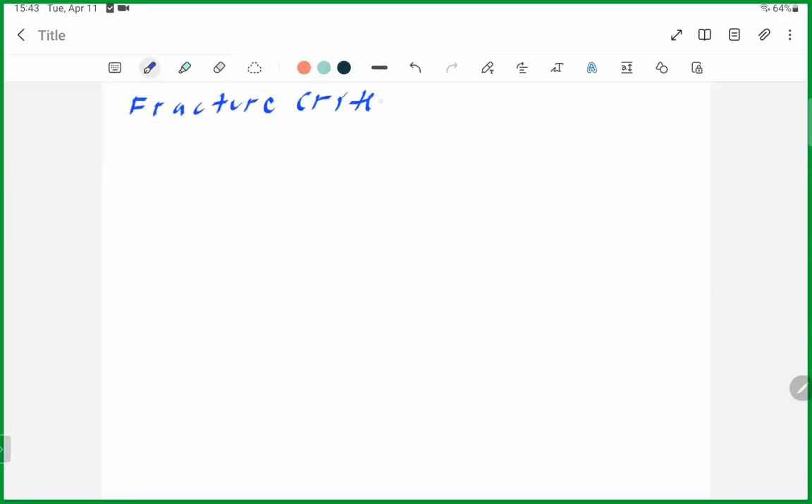In this lecture, I will talk about fracture criteria for mixed mode loading. So our title in this lecture is fracture criterion for mixed mode loading.

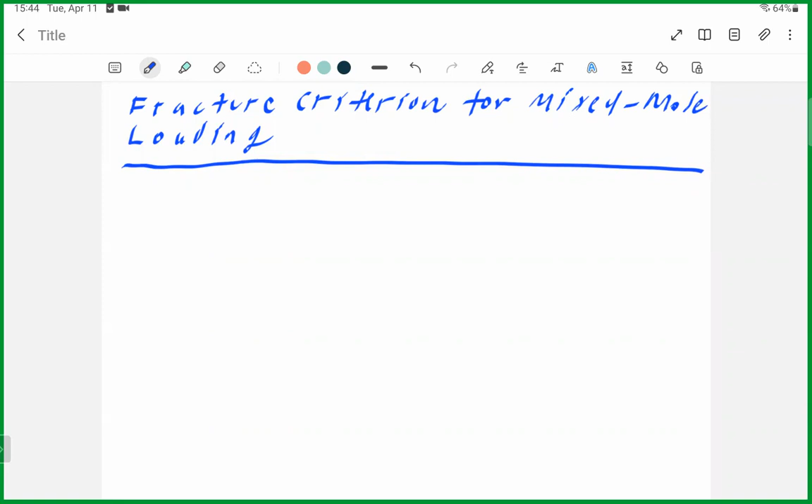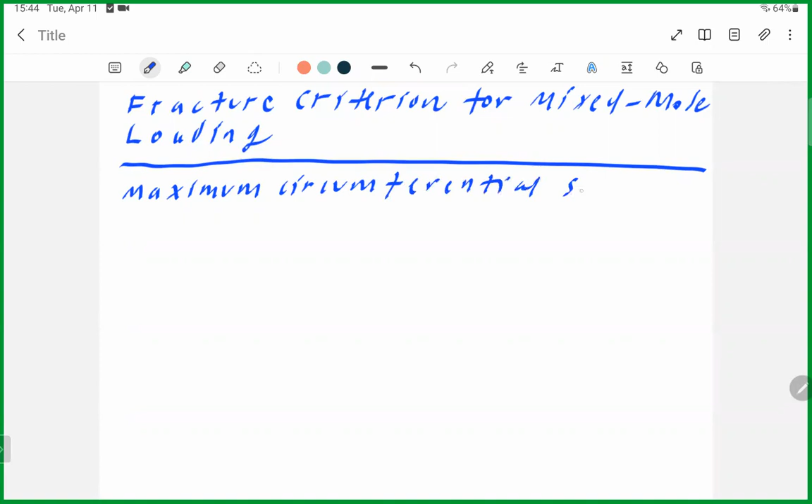Mixed mode loading. There are various fracture criteria for mixed mode loading, but we will consider one of these criteria, commonly used one or simpler one somewhat, that is named as maximum circumferential stress criterion.

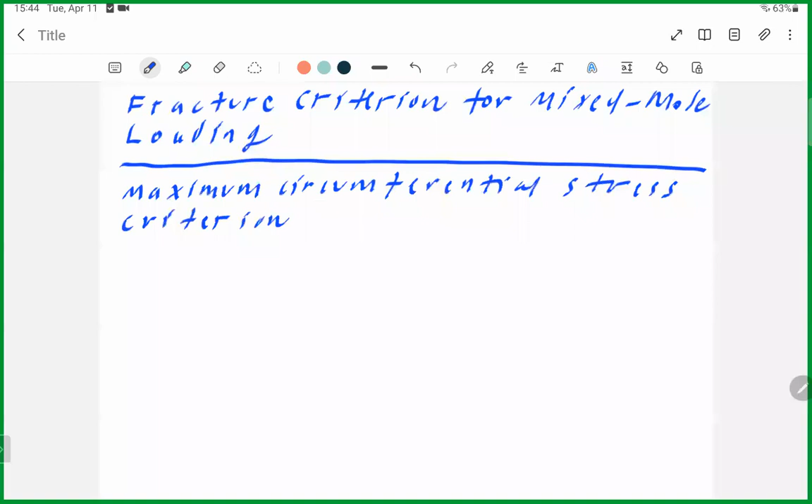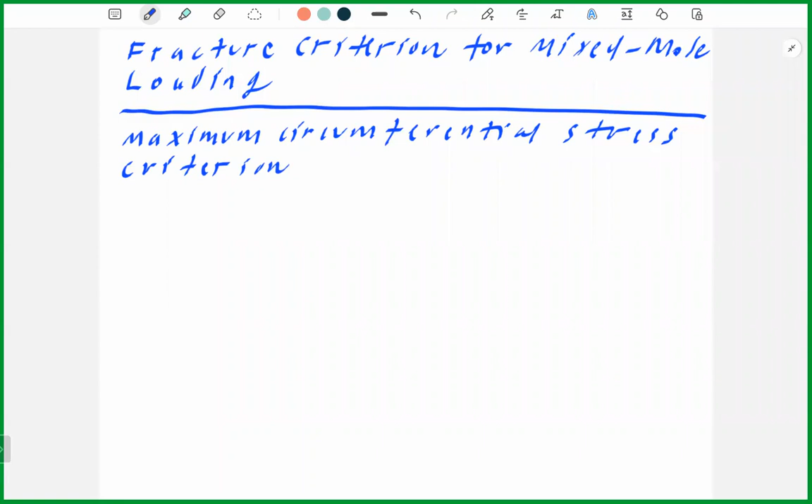This accounts for or considers the maximum stress on a given theta line. What's the maximum stress on that line? And it was developed at Lehigh University by Fazıl Erdoğan and George Sih. And we will see how this is developed.

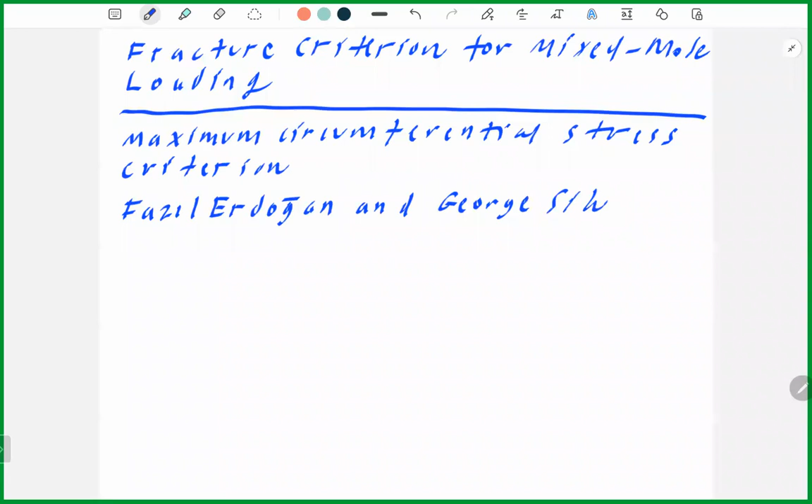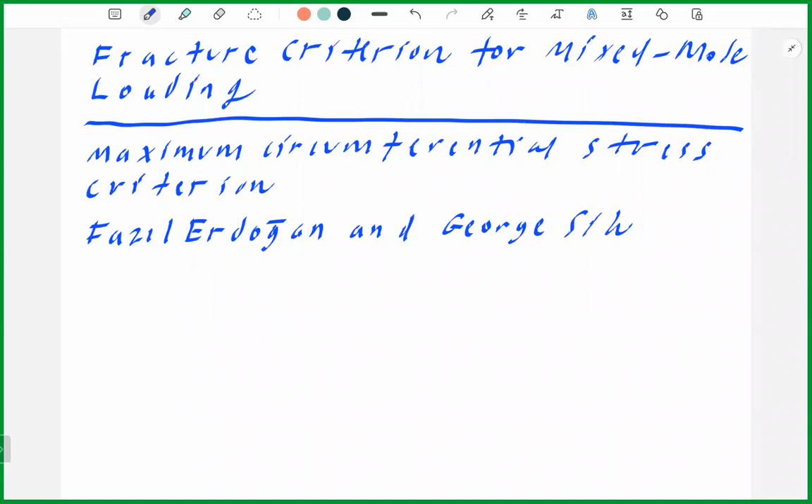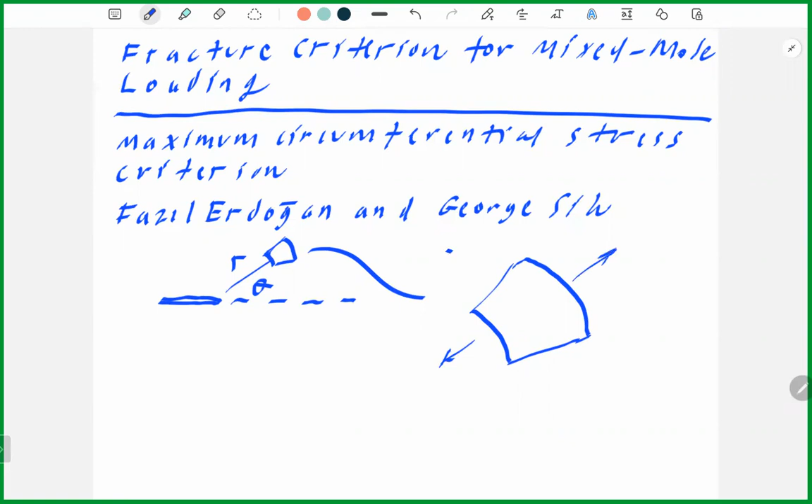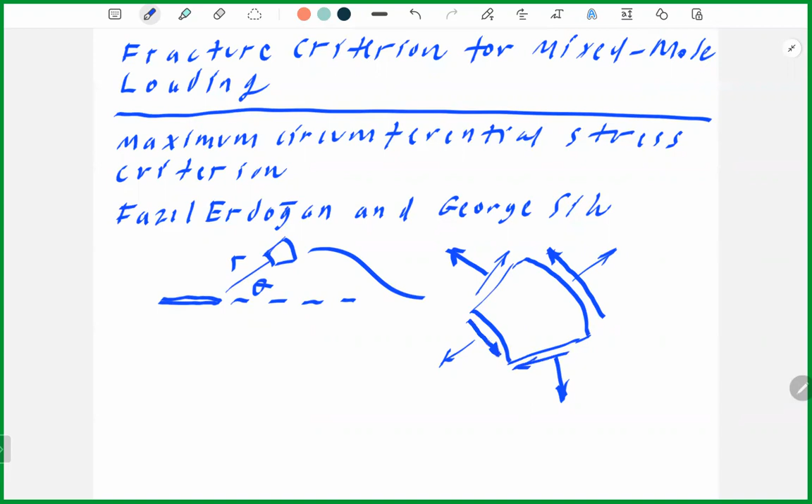It's the radial stress, circumferential stress, and shear stresses with positive directions according to the positive sign convention of elasticity. We can show stresses acting at that particular point. And these are sigma r, sigma theta, and sigma r theta. These are the components of stress.

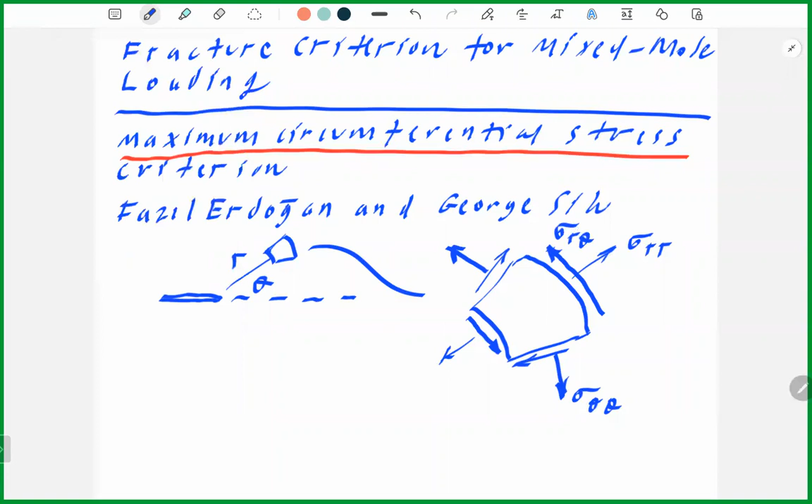And this particular criteria depends on maximum circumferential stress. And therefore, we will be looking into the variation of the circumferential stress. But what are the stresses and how can I find these stresses?

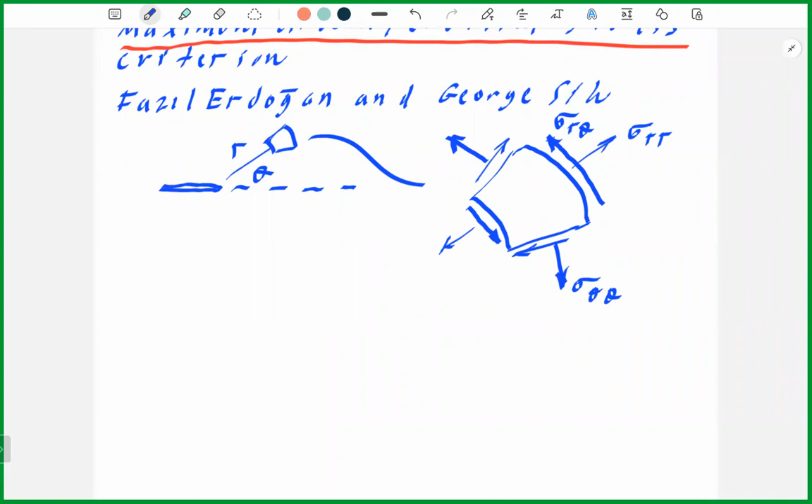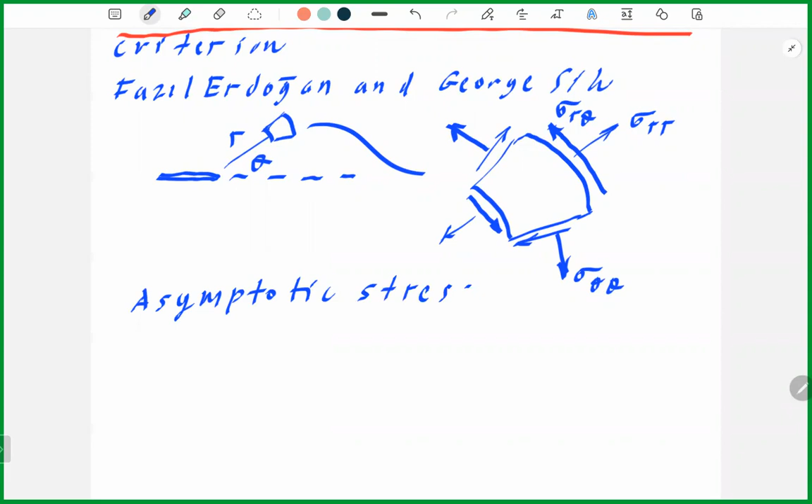We are not going to use the full field stresses. Here, we'll be working with asymptotic forms, asymptotic stresses as R goes to 0. We know how to derive these, or we know their forms as R goes to 0. And you know how to write them in the Cartesian coordinate system.

Say that is the Cartesian coordinate system, where the asymptotic forms are known at the Cartesian coordinate system, and find them in the polar coordinate system. What are the stresses in the polar coordinate system? That is the question. And we know that we can do this by stress transformation. This is rotated to an angle of theta. If stresses in the xy coordinate system are known, you can find the stresses in the polar coordinate system

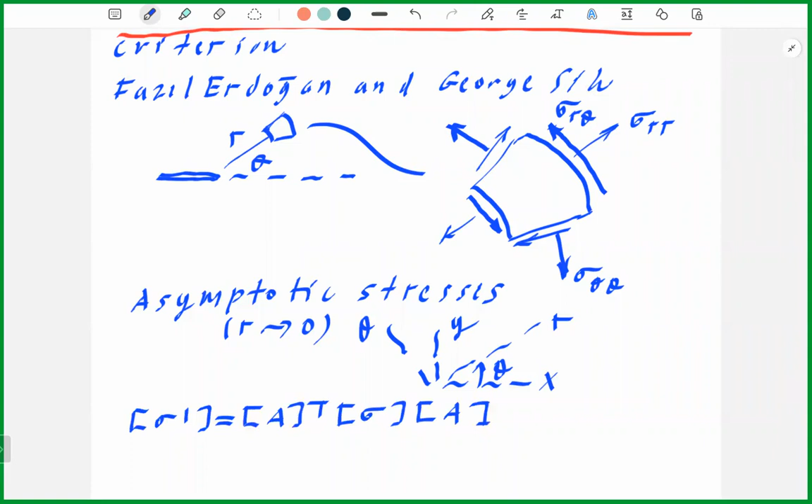from the elasticity or advanced strength of materials. We know how to apply a transformation formula. That's sigma prime. Sigma prime is A transpose sigma times A, where A is the transformation matrix. But we will not go into the details of these computations. I'm going to directly write down the results for sigma theta, sigma r theta. All of them can be found. But of particular interest here is sigma theta.

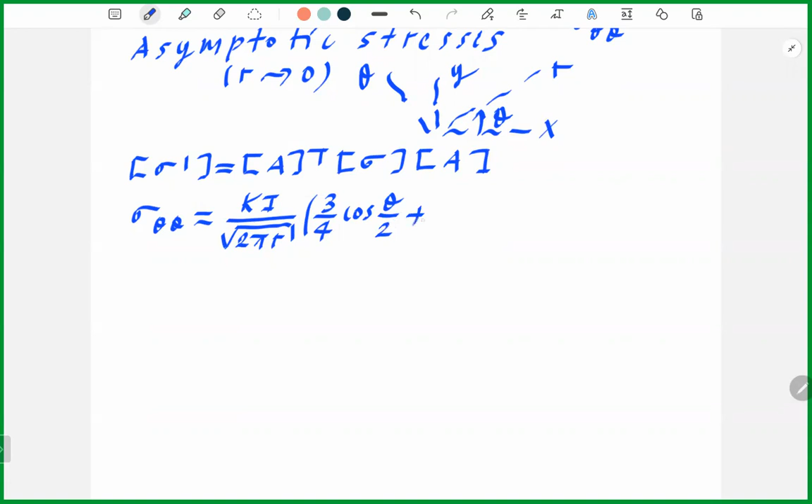So let me write an asymptotic form for circumferential stress. This can be found by transformation, and the final result is sigma theta equals K1 over square root of 2 pi r times 3 over 4 cosine theta over 2 plus 1 over 4 cosine 3 theta over 2. There's the mode 1 contribution plus

K2 over square root of 2 pi r times minus 3 over 4 sine theta over 2 minus 3 over 4 sine 3 theta over 2. This is the asymptotic form for sigma theta. In a similar way, you can find the expressions for sigma r theta, sigma r. It's possible to derive all these stress components.

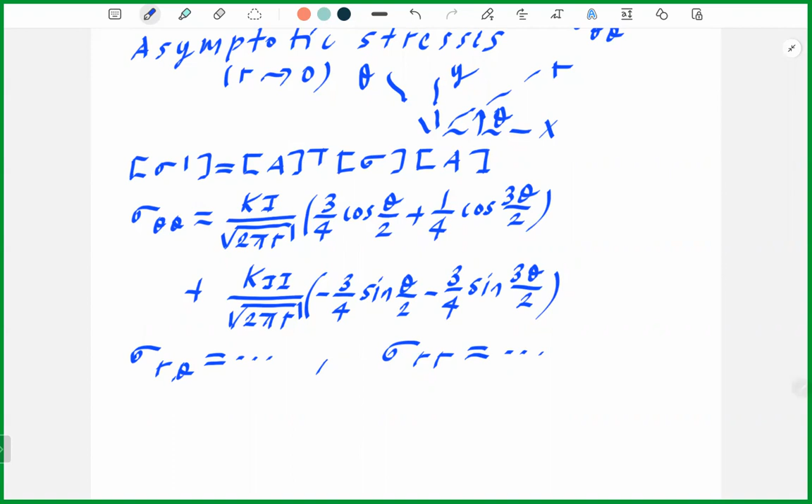And now, what is maximum circumferential stress criterion? And what are the underlying assumptions of these criteria? The first assumption states that crack initiation or fracture occurs at a theta angle for which sigma theta is maximum, hence the name maximum circumferential stress criterion. Therefore, we can indicate this as assumption 1.

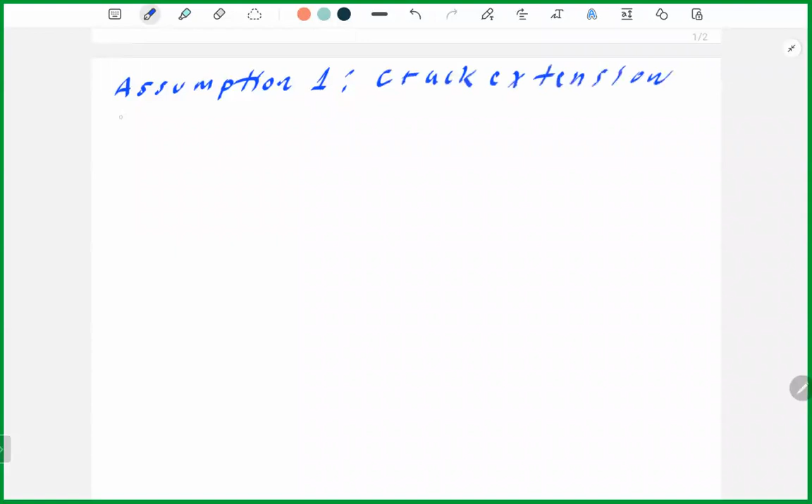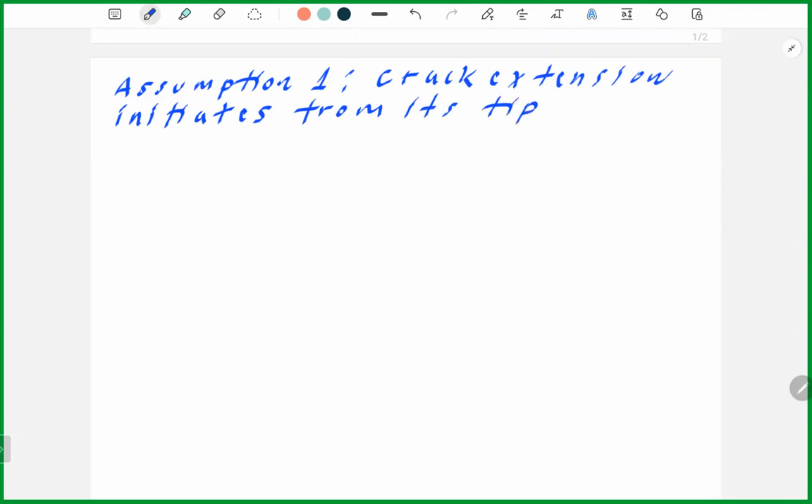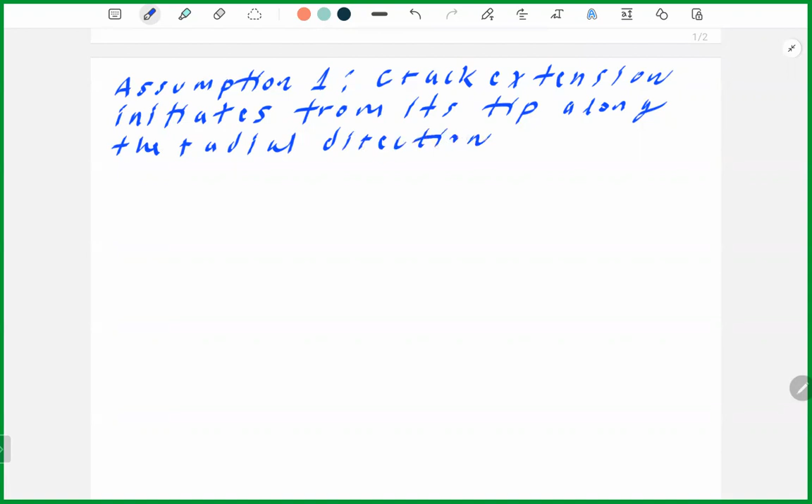And this states that crack extension, which means fracture, initiates from its tip along the radial direction theta equals theta critical or theta c, on which sigma theta is maximum, or on which sigma theta becomes maximum.

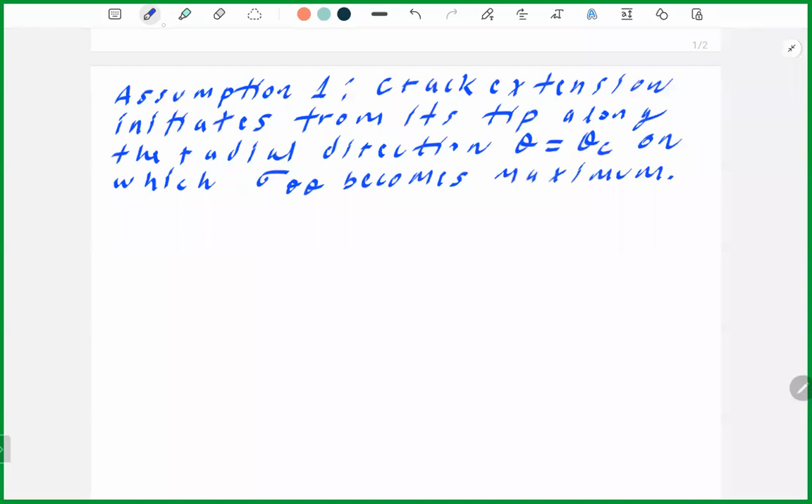This is the first assumption, this criterion.

We can find the angle for which sigma theta becomes maximum by differentiating this. We intend to find the angle for which sigma theta becomes maximum. Therefore, consider for a given r, consider r as a parameter, and try to find its derivative, or equate the derivative to 0, to find the angle for which sigma theta goes to the maximum. And for that optimum point to be a maximum, the second derivative, d2 sigma theta over d theta 2, has to be less than 0.

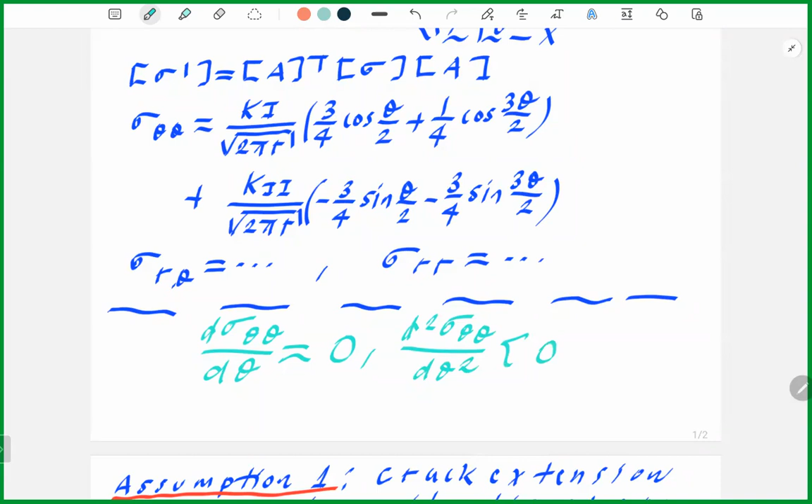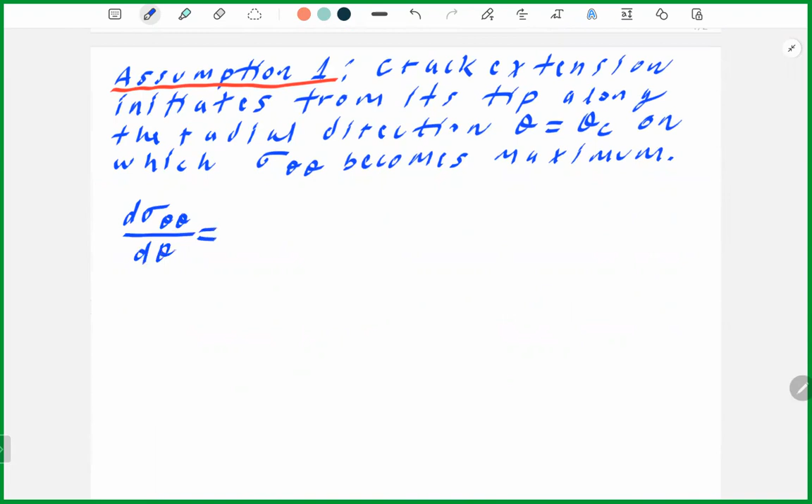That's the second condition. Now we can apply this, differentiate sigma theta here with respect to theta. Write the derivative, d sigma theta d theta, equals k1 over square root of 2 pi r.

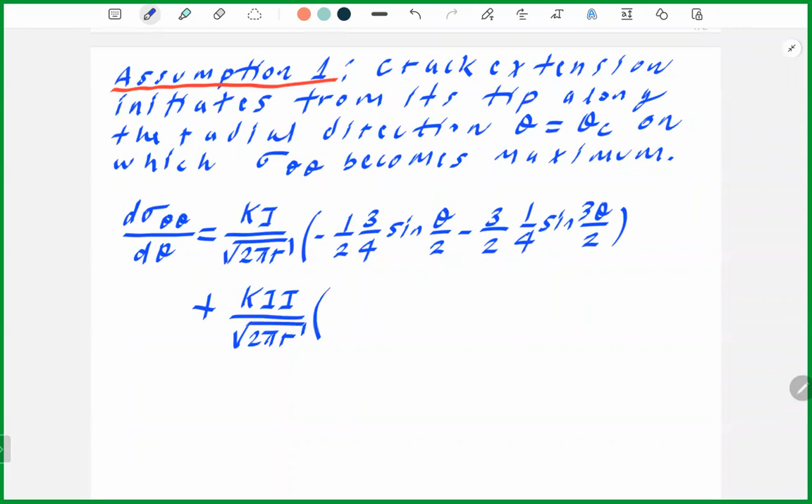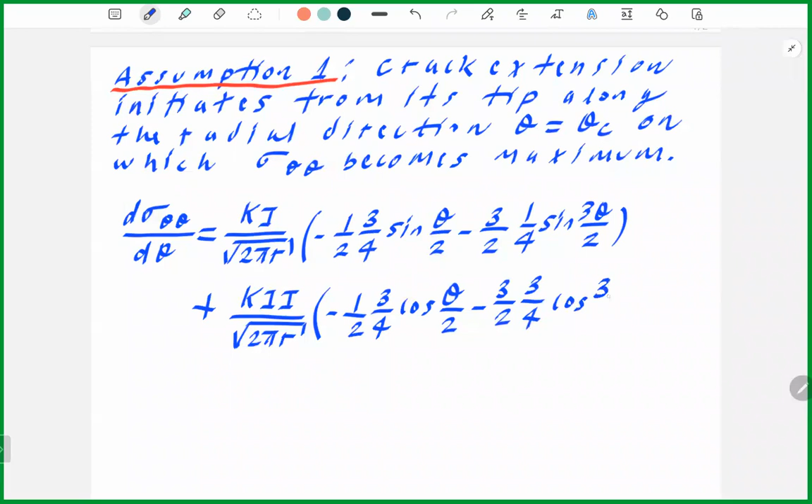Differentiating the terms: minus 1 over 2, 3 over 4, sine theta over 2, minus 3 over 2 times 1 over 4, sine 3 theta over 2. That's the first term; differentiate the second one with respect to theta: k2 over square root of 2 pi r, minus 1 over 2, 3 over 4, cosine theta over 2, minus 3 over 2, 3 over 4, cosine 3 theta over 2, and this derivative is 0.

Although it looks somewhat lengthier, we can simplify it: factor out 1 over square root of 2 pi r, multiply both sides by 8, eliminate the minus sign, and you will find the necessary criterion as k1 times sine theta over 2 plus sine 3 theta over 2, plus the second term k2 times cosine theta over 2 plus, there's an extra 3 here, 3 times cosine 3 theta over 2, and this is 0.

That's a neat result, which is going to give you the direction for crack propagation. This is our first result. I can use this to determine the angle theta critical, calculating theta critical using this result.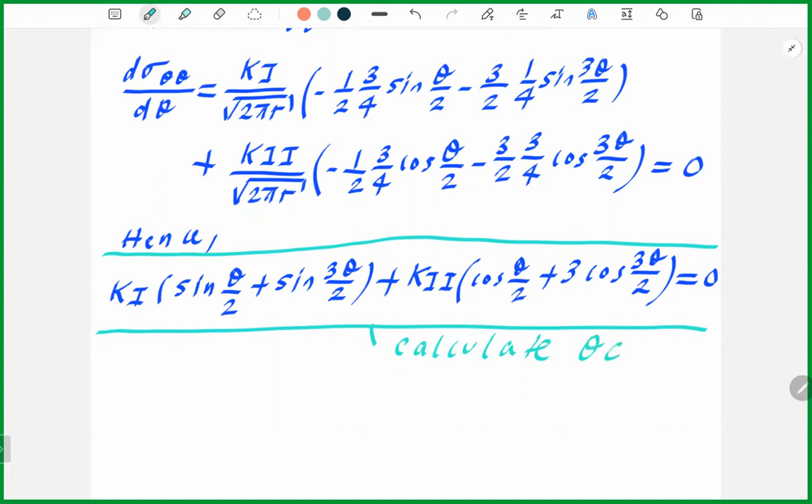Now this is for the angle or direction, and we need to have a criterion for the magnitude of loading. This was for direction, and that is related to assumption 2 in this criterion by Erdogan and Sih. It states that at the point of fracture, maximum circumferential stress on the theta critical plane is equivalent to maximum circumferential stress observed in mode 1 fracture, mode 1 failure. That is assumption 2.

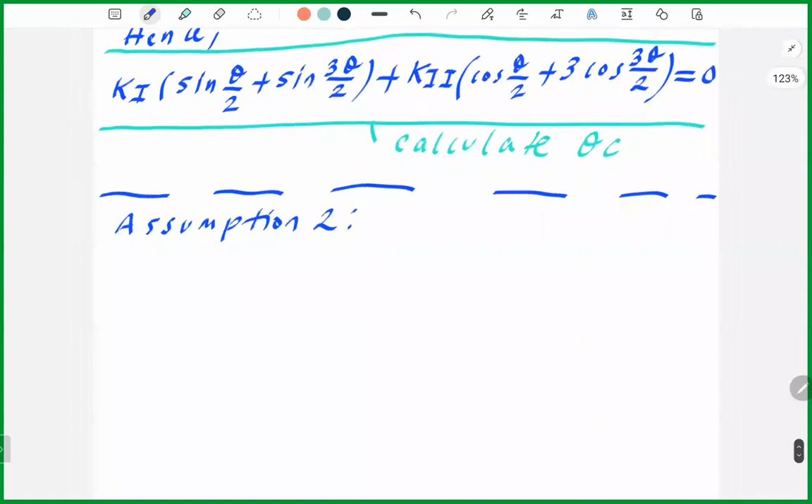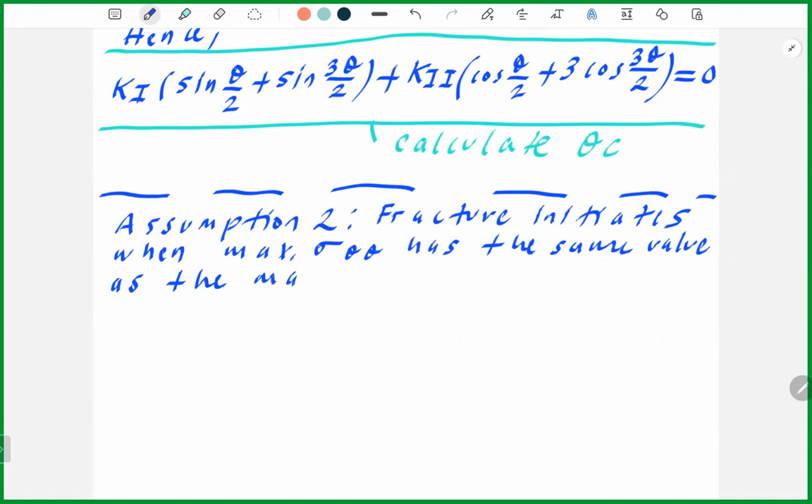If we write it, it states that fracture initiates when maximum sigma theta has the same value as the maximum sigma theta computed for mode 1 fracture of the same material, of course.

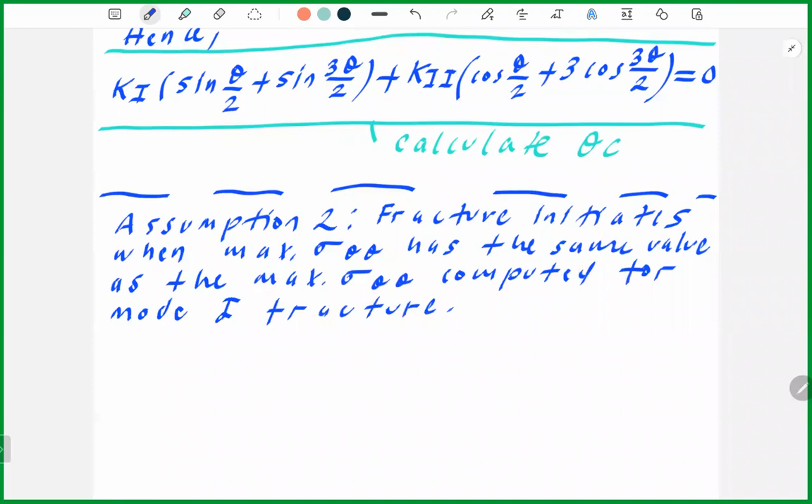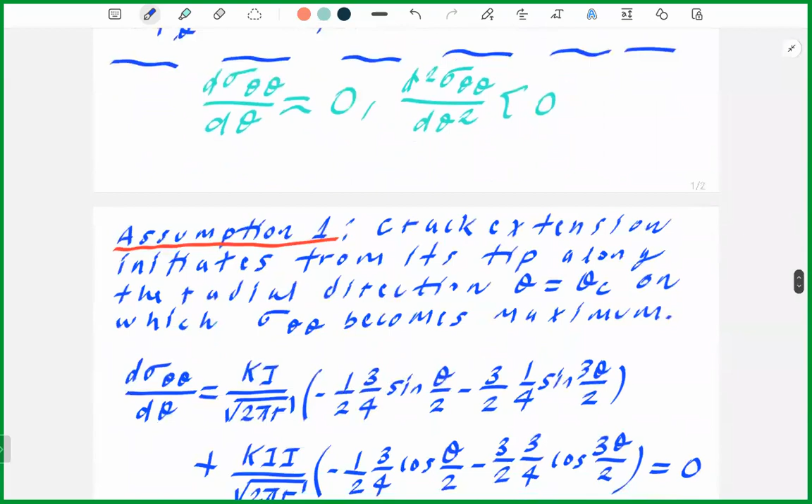Second hypothesis of this criterion, which means that we have to substitute theta critical in this equation. Replace theta by theta critical in this equation, and you get...

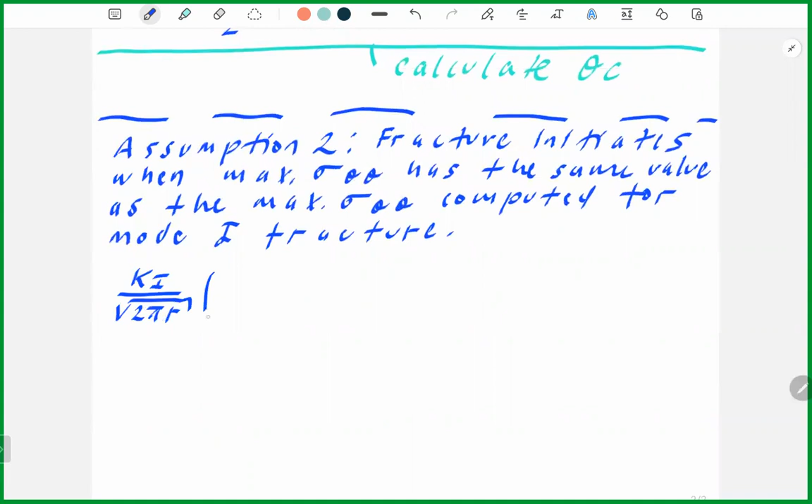K1 over square root of 2 pi r times 3 over 4 cosine theta critical over 2, plus 1 over 4 cosine 3 theta critical over 2, plus K2 over square root of 2 pi r times minus 3 over 4 sine theta critical over 2, minus 3 over 4 sine 3 theta critical over 2.

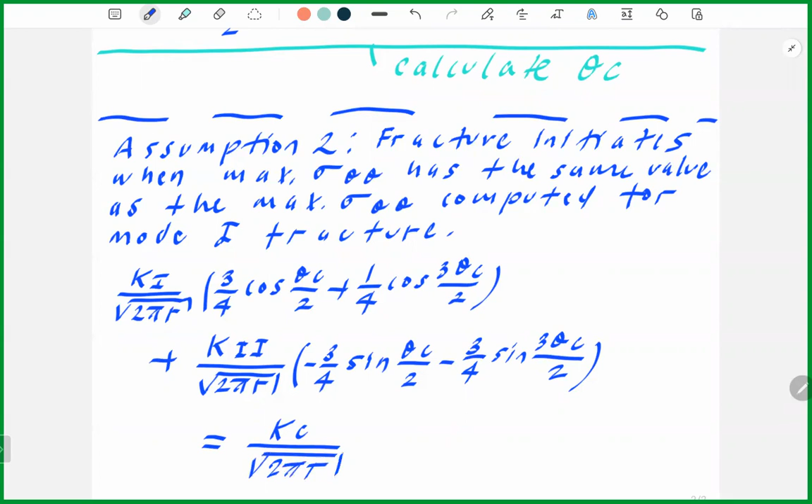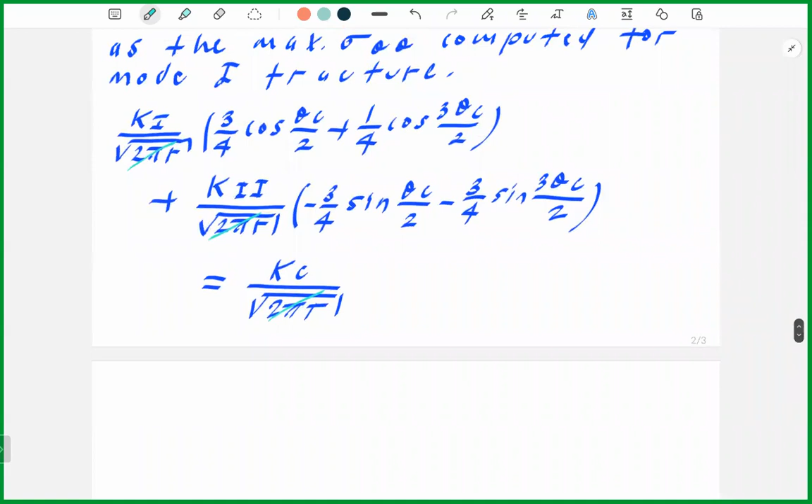This should be equivalent to the maximum circumferential stress at the point of fracture for mode 1 loading, which is KC over square root of 2 pi r. We can simplify this; these are cancelled out. Multiply both sides by 4, cancel those out and multiply both sides by 4, and I'll get the result for the second hypothesis.

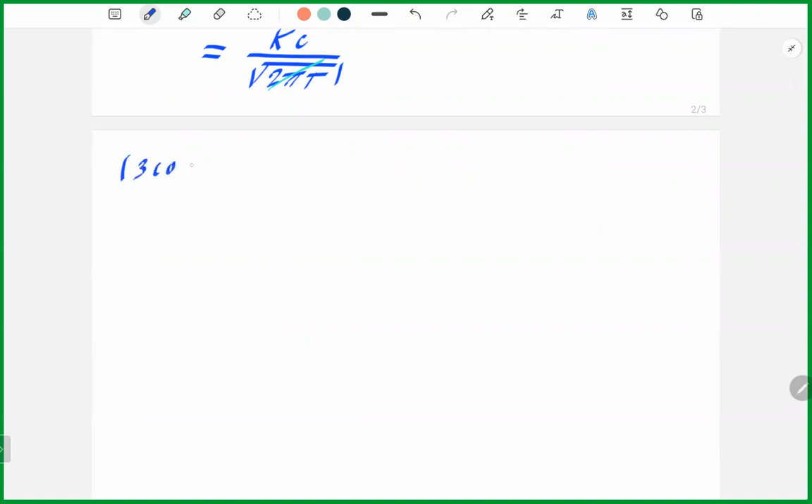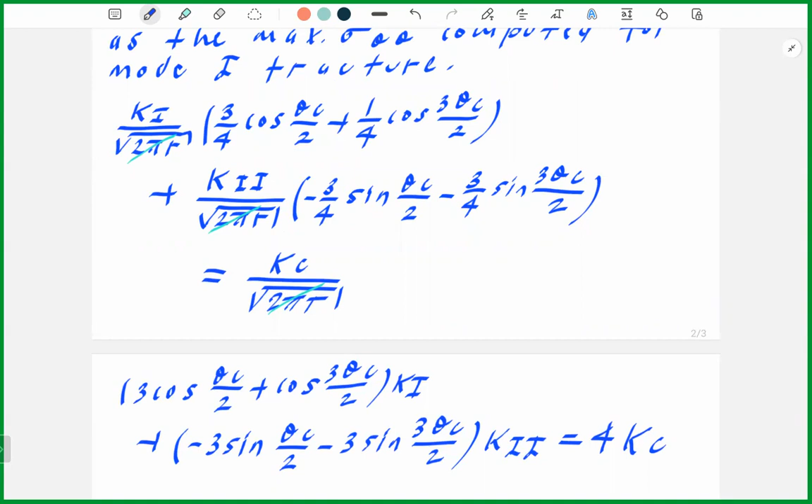This problem becomes: 3 times cosine theta critical over 2, plus cosine 3 theta critical over 2, times K1, plus minus 3 sine theta critical over 2, minus 3 times sine 3 theta critical over 2, times K2, equals 4KC. You see that these are cancelled out; when you multiply by 4, you get 3 here, 1 here, 3 here, minus 3 at the other end.

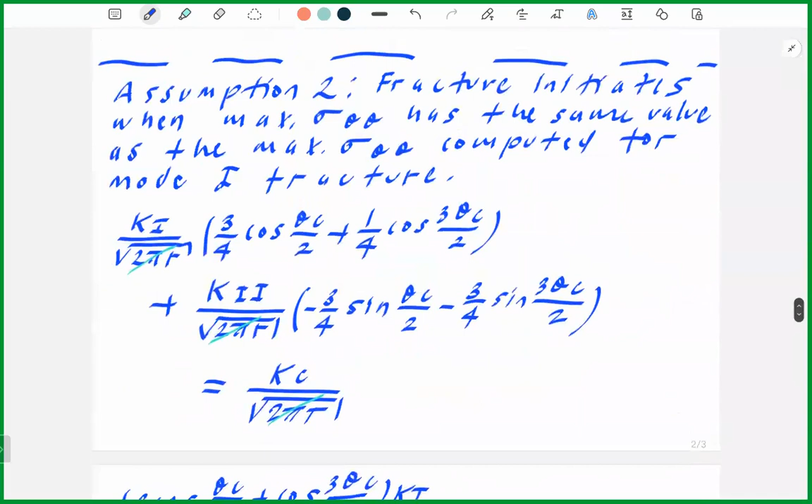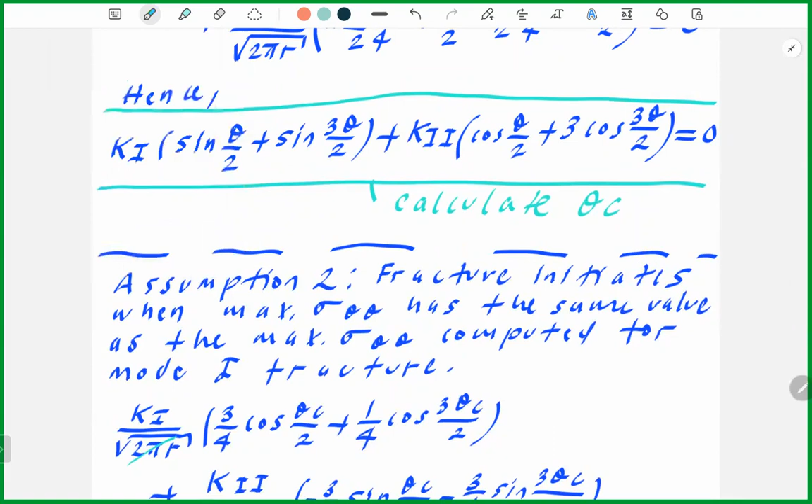Now, this is the second condition, and that's going to give you the loading associated with this failure criterion. Basically, there are two main equations: one, I can find theta critical from this; and two, calculate sigma, parameters associated with loading. Any questions or comments on this result?

I'm going to give an example for the application of this procedure. This is a hypothesis, but it is an experimentally verified criterion. It agrees somewhat with experimental results, so there's a level of accuracy. However, it can be used to predict the onset of fracture for mixed mode problems. This is valid for mixed mode problems as well as for pure mode 2 problems.

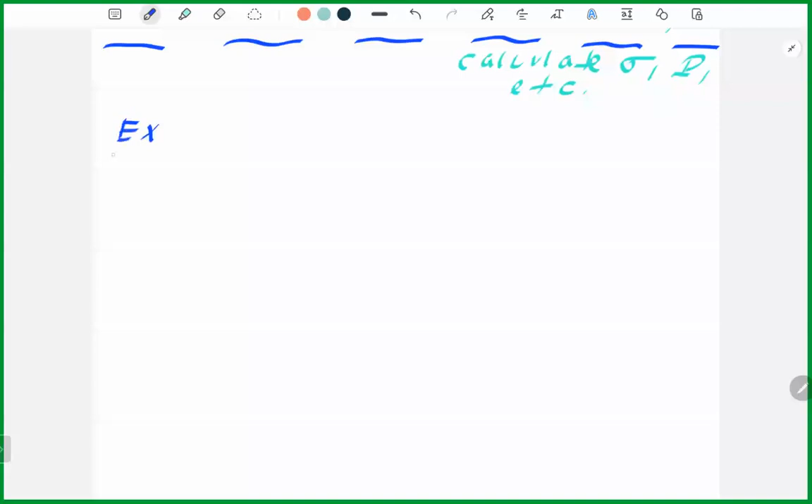And the first example I'll be talking about, say that example, is related to pure mode 2 loading. But still, you have to implement this. You cannot, or we do not, use mode 1 criteria for pure mode 2 loading.

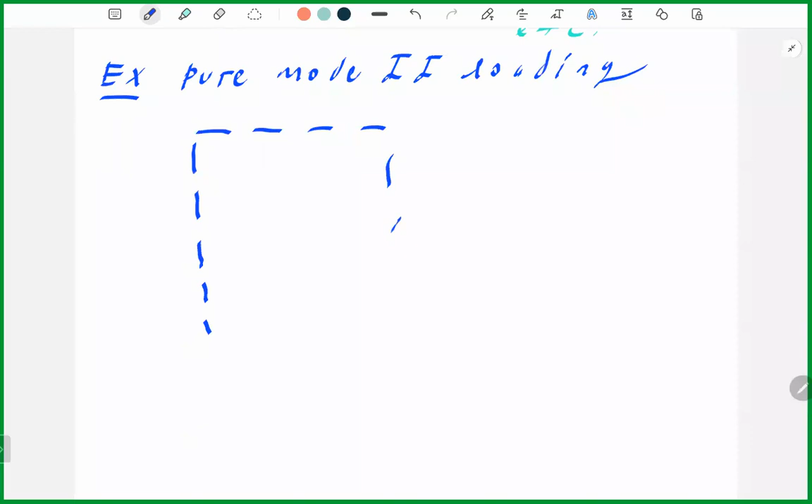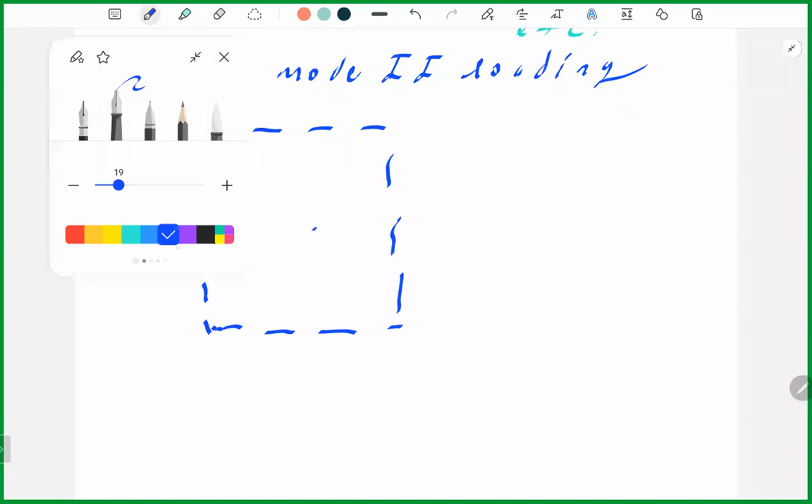Geometry here involves a crack in an infinite plane. Suppose that this is an infinite plane, and there's a crack in the infinite plane. There's the crack. Length of this is 2a.

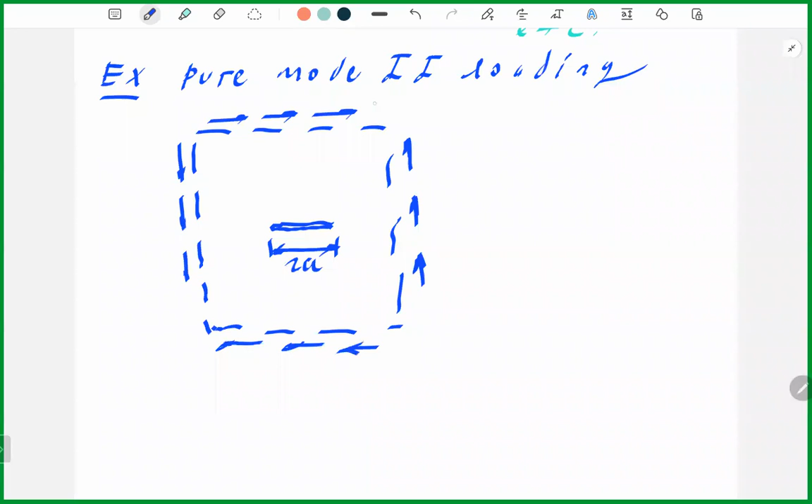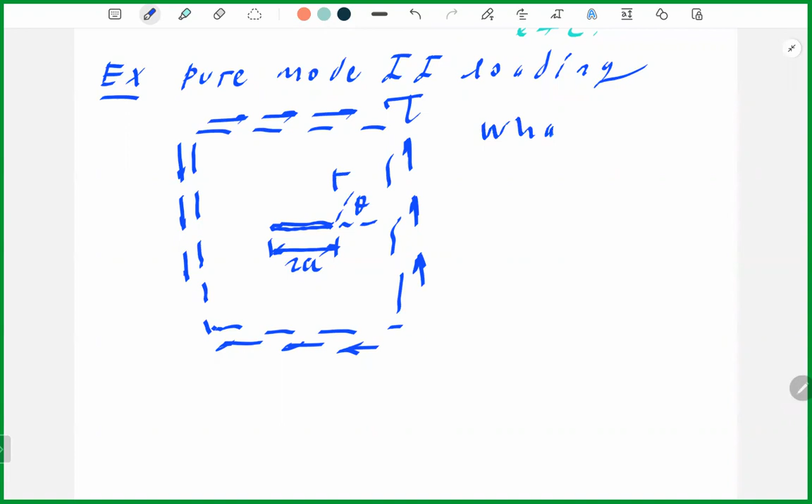And I can show the polar system at the crack tip. What are tau and theta? Tau critical and theta critical when fracture occurs because of this crack.

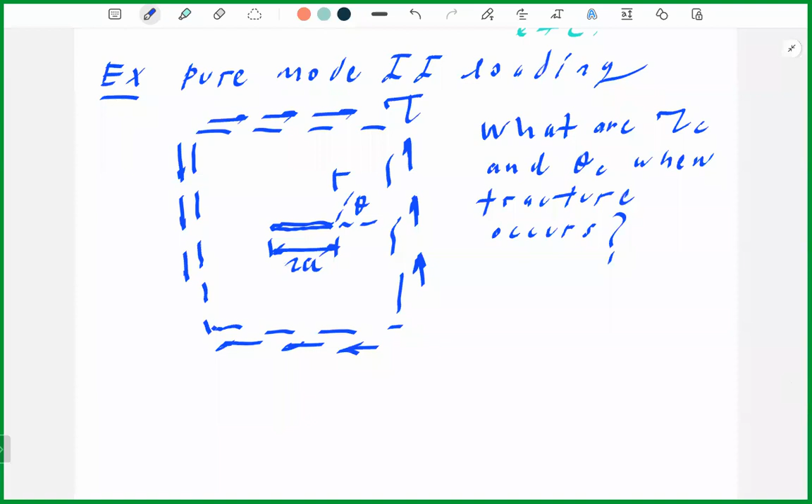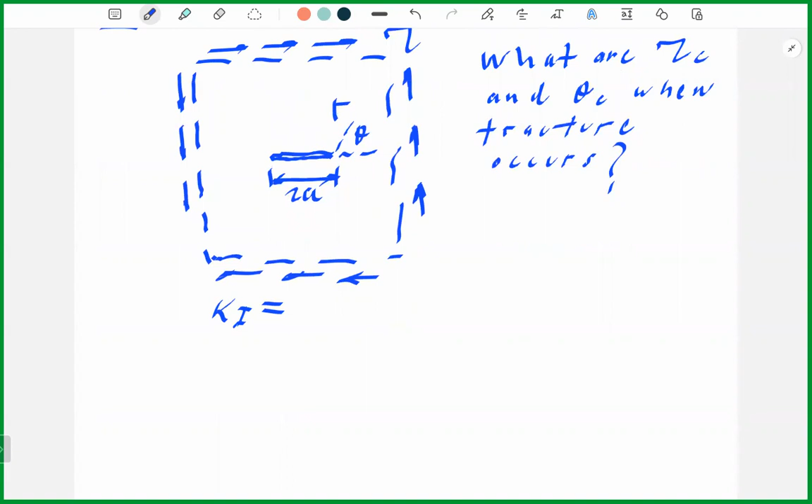Test problem statement: what are the values of these at the point of fracture? I can implement this. First of all, what is K1 here? What's K1 for this problem? Yes, that's the answer, that's 0. We know that there is no mode 1 loading, therefore K1 is 0.

And K2 is known. We have talked about these, or you considered such a geometry in the homework. K2 is tau times square root of pi a for this crack, mode 2. Stress intensity factor is known. K1 and K2, they are known.

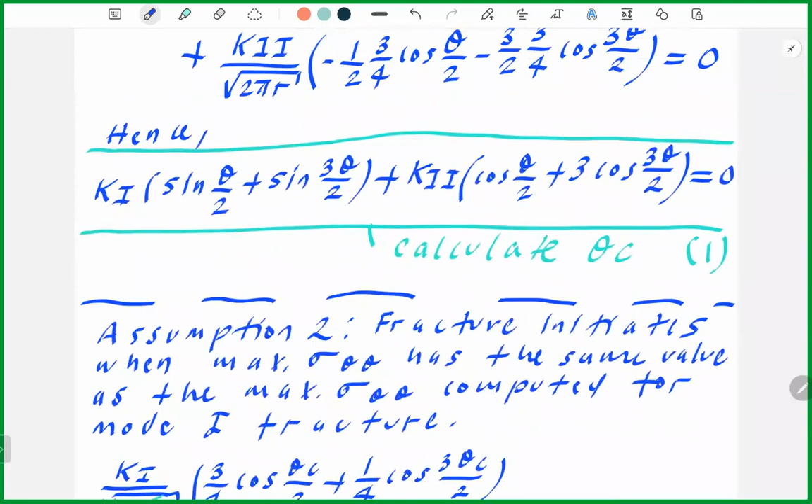Apply condition 1 first. What is condition 1? If we go back, this is condition 1. But K1 is 0, therefore K2 times the expression is 0. You can factor out K2, which means that cosine theta critical over 2 plus 3 times cosine 3 theta critical over 2 equals 0. That is the result for condition 1.

Let me write it as theta: cosine theta over 2 plus 3 times cosine 3 theta over 2 equals 0. We have to solve this and find the roots in the region from minus pi to plus pi.

How can you solve this equation? Which math package are you going to use to solve this? Probably MATLAB, is that right? I have solved it by Maple. With any math package, you'll be able to find the roots, or apply a numerical method yourself, such as Newton-Raphson or any other suitable method.

There are 2 roots in this interval. One of them is minus 1.231 radians, and the second root is 1.231 radians. And which of the roots is to be selected here? Which one? And how can I find the actual root?

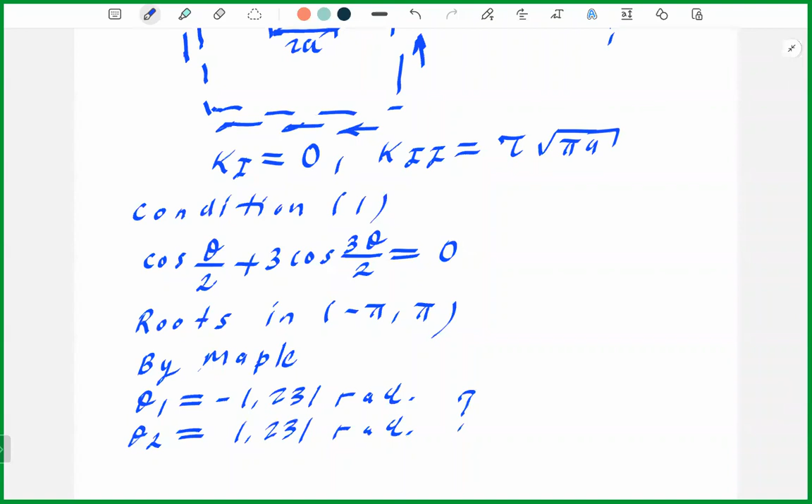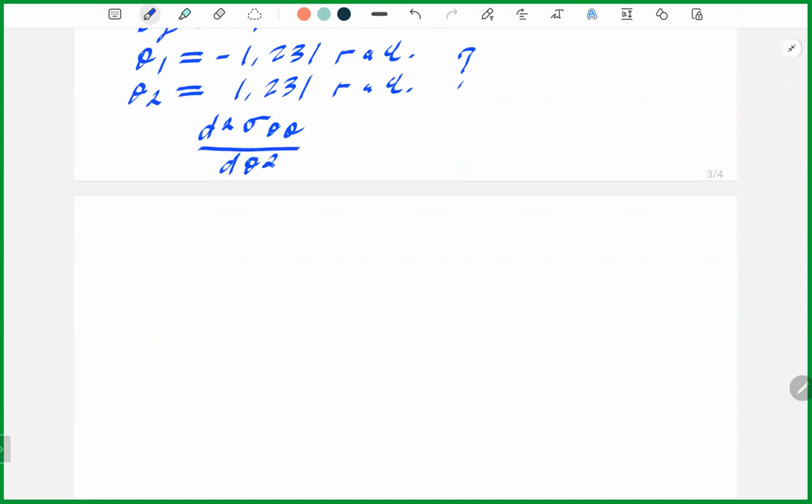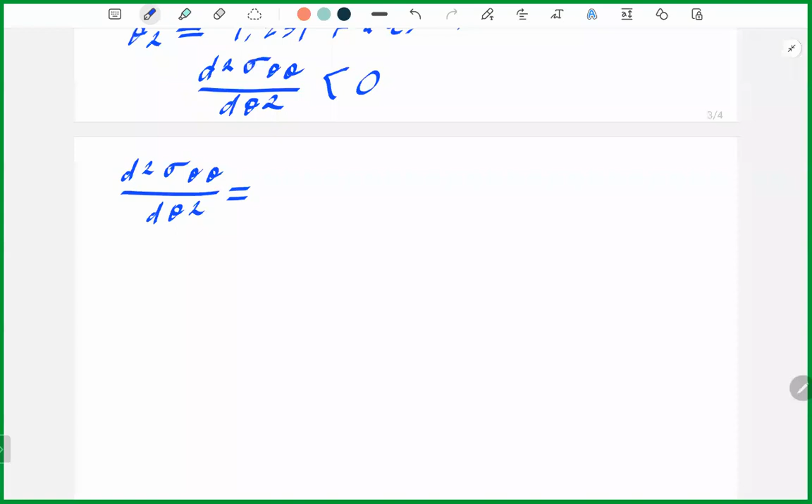This is related to the sign of the second derivative. If you recall, we have mentioned that d2 sigma theta, d theta 2, has to be negative for the particular root to give the maximum point. And if you evaluate the second derivative, d2 sigma theta, d theta 2, with K1 equal to 0, the second derivative is K2, which is always positive, over square root of 2 pi r, which is always positive.

And if you evaluate the second derivative, you will find 3 over 16 sine theta over 2, plus 27 over 16 sine 3 theta over 2. Find the sign of this.

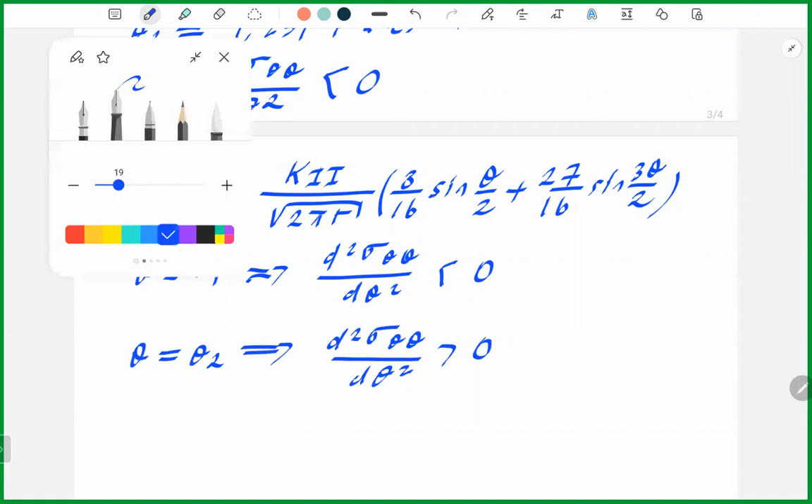Substitute theta 1, for example, theta equals theta 1, into d2 sigma theta, d theta 2. This turns out to be negative. And for theta equals theta 2, d2 sigma theta, d theta 2, that's positive. Which of these is the actual root? Which one? Theta 1. Yes, that's right. Theta 1 is our solution, or the root.

It gives crack direction. Crack extends along the direction minus 1.231 radians, and we can now summarize this result.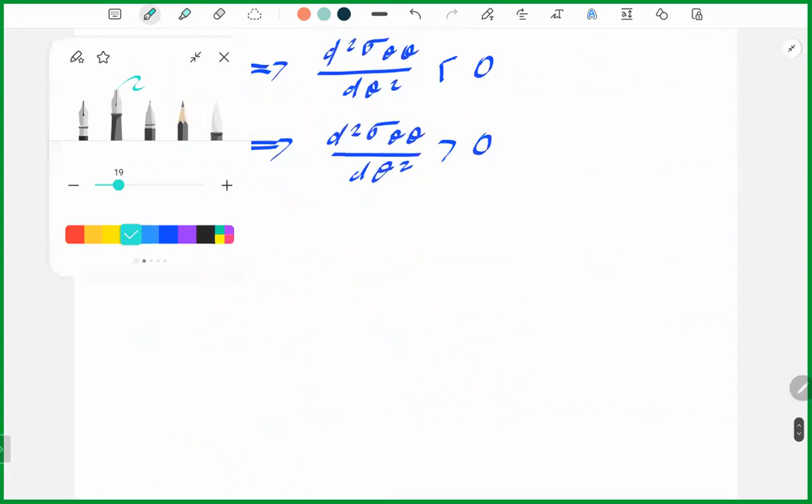And that is the condition for a maximum point. It's from calculus, if you recall, the conditions for a function to be maximum at a certain point. Let's say that f is a function of x; at a certain point, if it's a maximum, these conditions should be satisfied, and if it is a minimum point, f prime of x is 0. So you review these conditions from calculus.

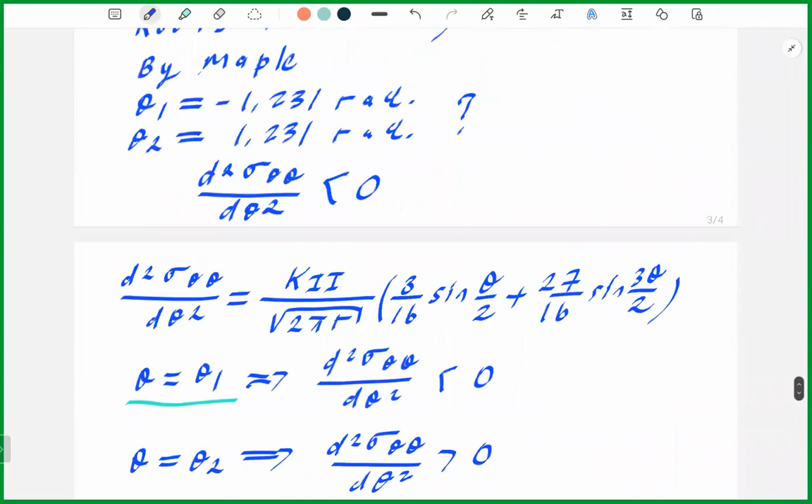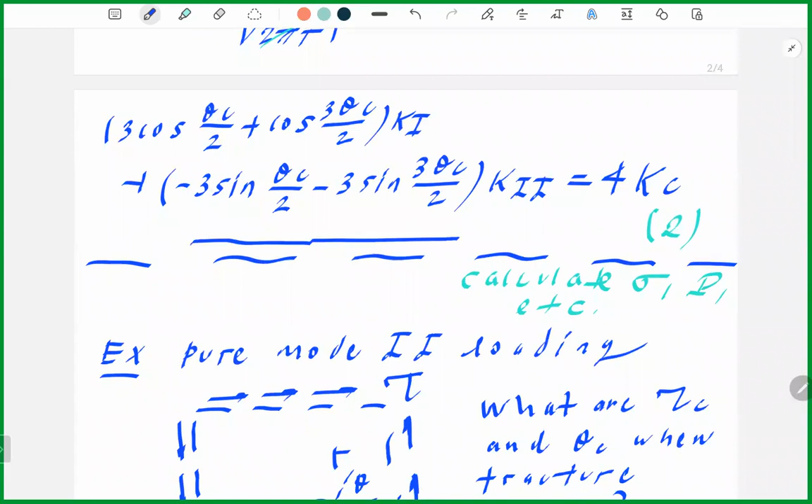Critical stress, second assumption, and this second equation. I'm going to go back to the second equation we have derived. Second one: K1 is 0, therefore we will consider this: minus 3 sine theta critical over 2, here the first term, minus 3 sine 3 theta critical over 2, second term, equals 4Kc. And there's K2. Write down this result.

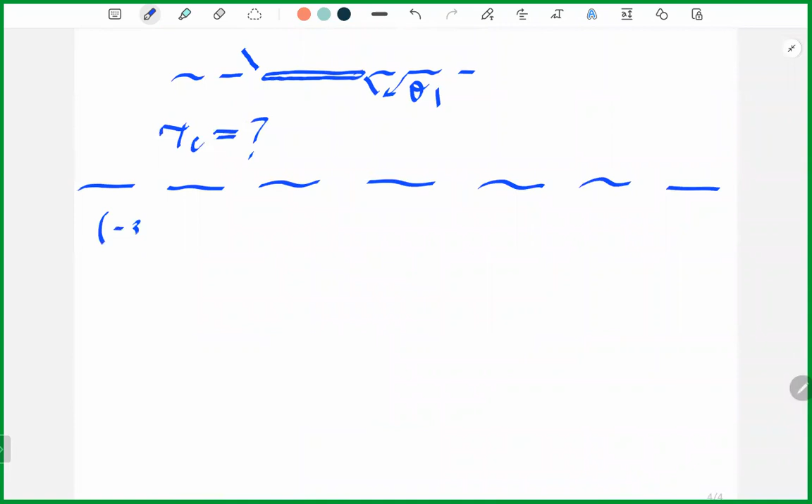We are going to use this second equation, which is minus 3 sine theta critical over 2 minus 3 sine 3 theta critical over 2, times K2, which is tau critical times square root of pi a. And this is 4Kc. You can find therefore tau critical by applying this result.

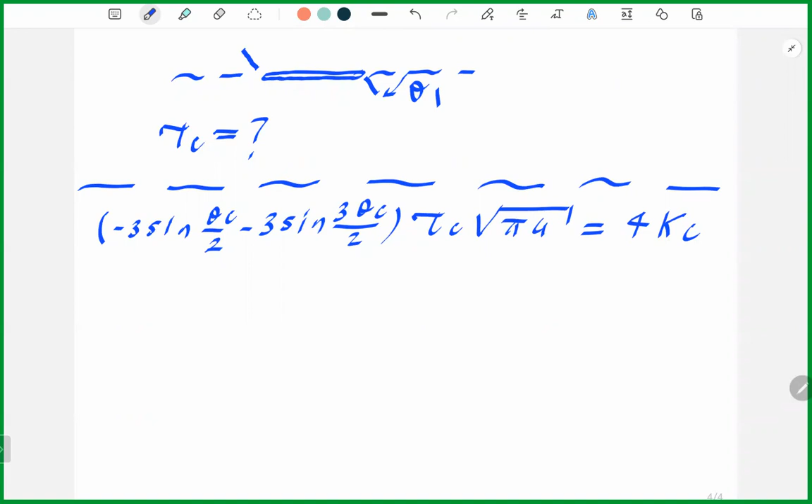However, I have used certain numerical values. For example, I have taken Kc as 30 megapascals square root of meters, and I have used 10 millimeters for crack length. Theta critical is known. Calculate tau critical numerically.

And that's going to give you, for example, 146.6 megapascals. This is the level of stress. And when you apply this stress, there is going to be a change in crack path, the initial crack path.

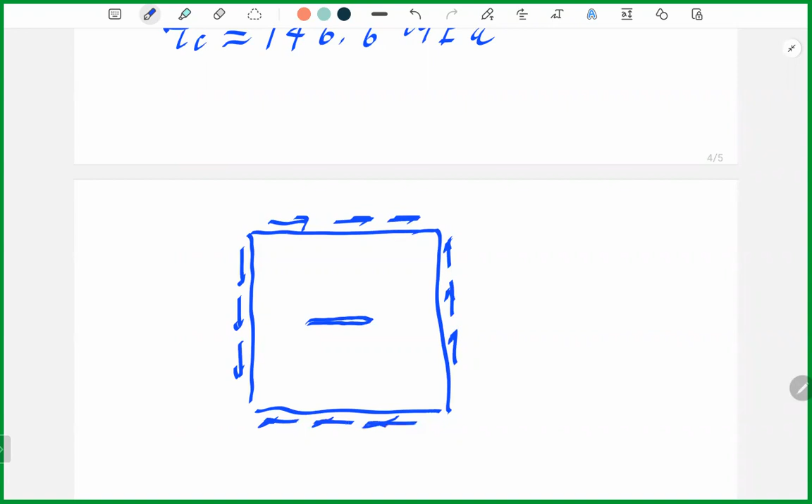This was a crack under shear loading, pure shear loading. And according to this criteria, when you apply this stress, the crack realigns itself and changes direction, deviating from the center line. The crack is trying to become - the crack plane is trying to become normal to the direction of principal stress, actually.

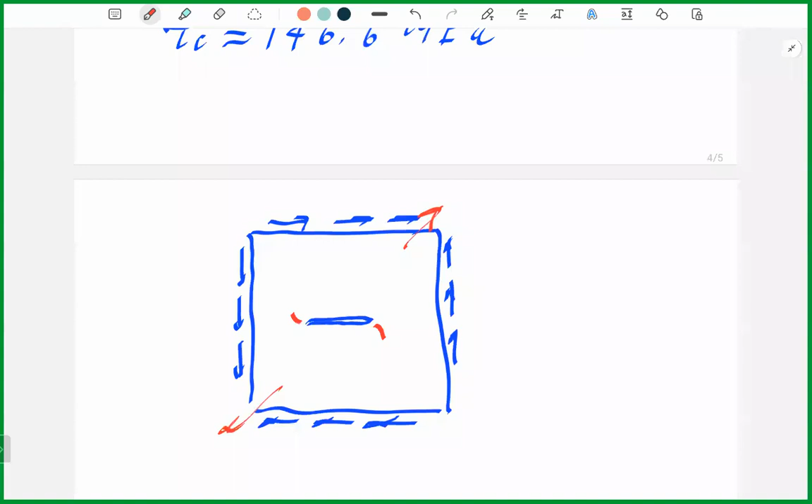This occurs in crack problems. If you apply loading, as the crack grows, eventually the crack plane will be perpendicular to the direction of principal stress, and it will try to become a purely mode 1 problem if it propagates. But here we have calculated the angle - what is the initial angle for crack propagation?

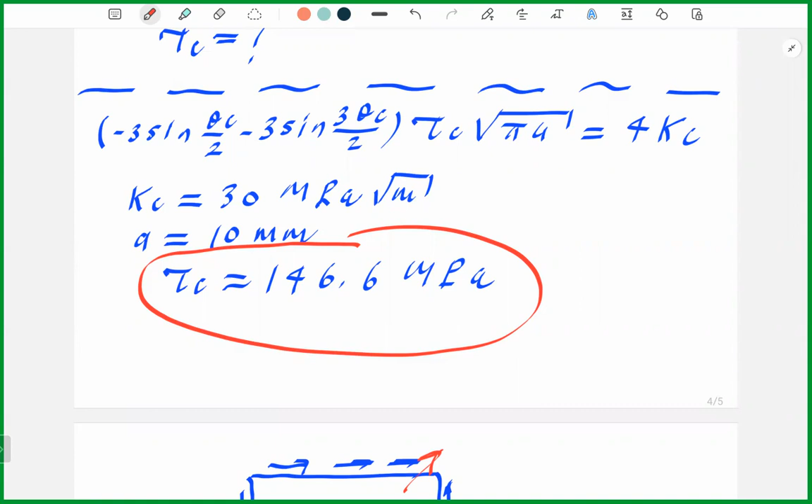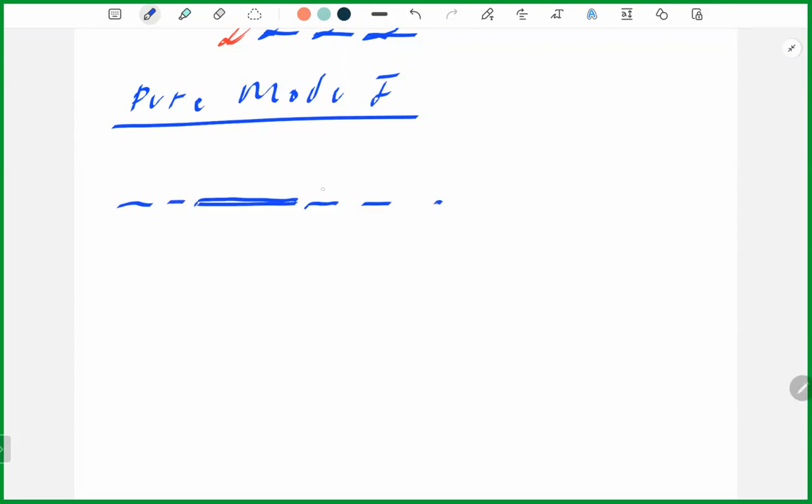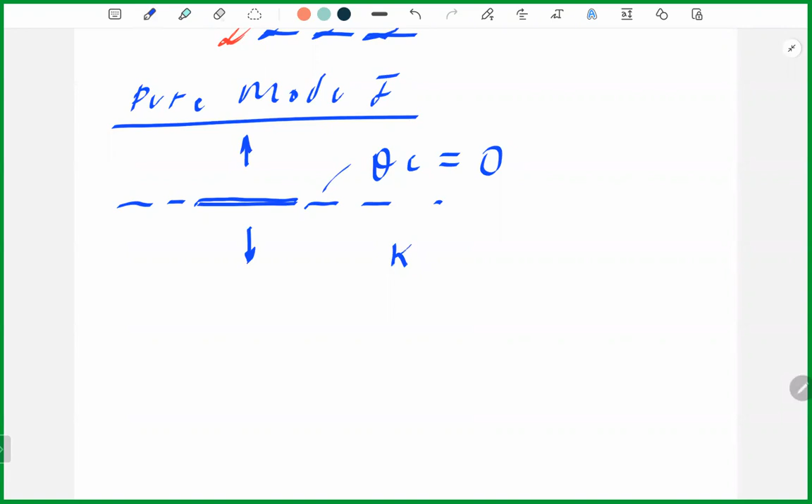Hocam, K1 at failure equals Kc. Yes. In mode 1, theta critical is always 0. There is no need to find theta critical in mode 1 problems - it is always 0, we do not find it. And the second one reduces to K1 equals Kc. Therefore this is the criterion for mode 1.

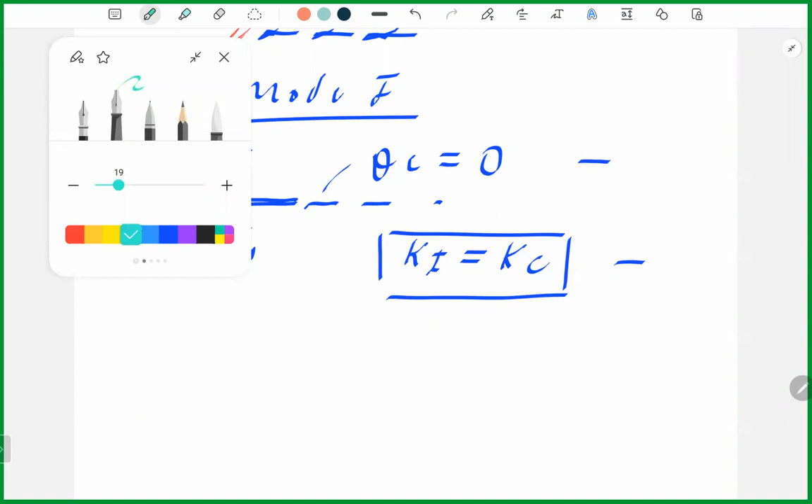K1 equals Kc, but the problem is more complicated. In mixed mode, we have to find both theta critical and loading. Crack always propagates on its own plane in mode 1 problems, and the crack is always propagating on the plane of symmetry in the mode 1 problem.